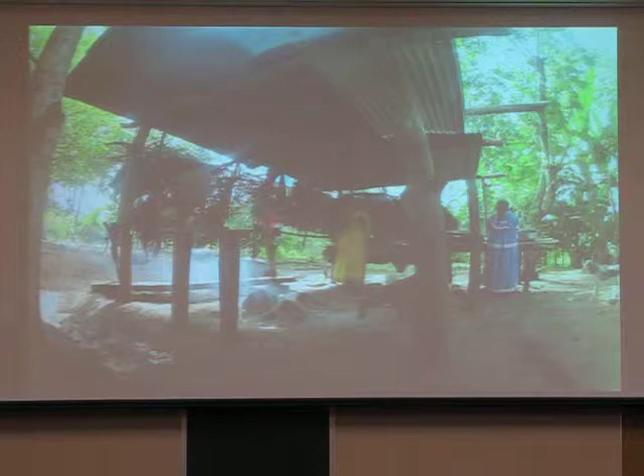An interesting thing we encountered in the community is the boiling of the water was not done at all for a sanitation reason or for disinfection, but simply for cooking their food. When they would cook their coffee, they would boil a couple inches of water, and that would form some treatment, but then they would add untreated water to dilute it. So this boiling of water was important, but it wasn't for the purpose of treating the water, which we found to be an issue.

Currently, water for households for cooking and drinking is carried by bucket from each water source. Each water source is also used for laundry and for bathing.

The task of going and getting water and bringing it back is very time consuming, and while speaking with the community members and the Peace Corps volunteer, it was determined that the need for accessible, clean water was of great importance to the community.

Yucca Engineering then tasked themselves with conducting a water quality assessment, and they also did a water quantity assessment at the source.

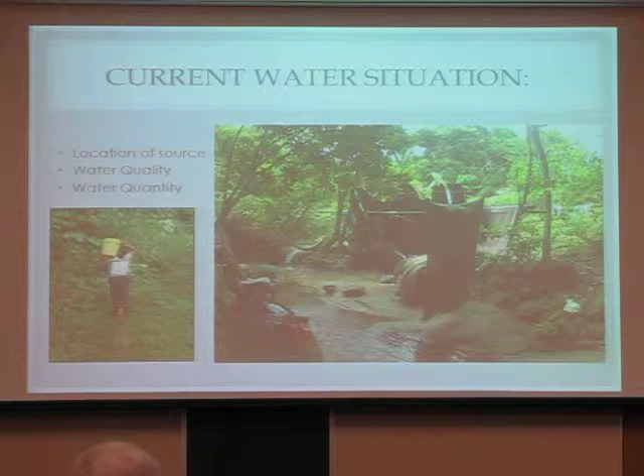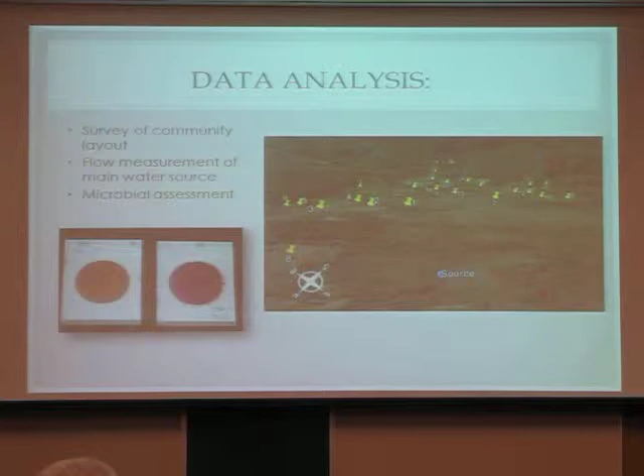First, Yucca Engineering hiked around the entire community with volunteers, and by using a GPS, we were able to pinpoint, as seen here with the yellow pins, each household in the community. As you can see, the community is not very widespread. It basically goes from uphill to downhill, and that was a good part of our assessment trip, to figure out where everything was.

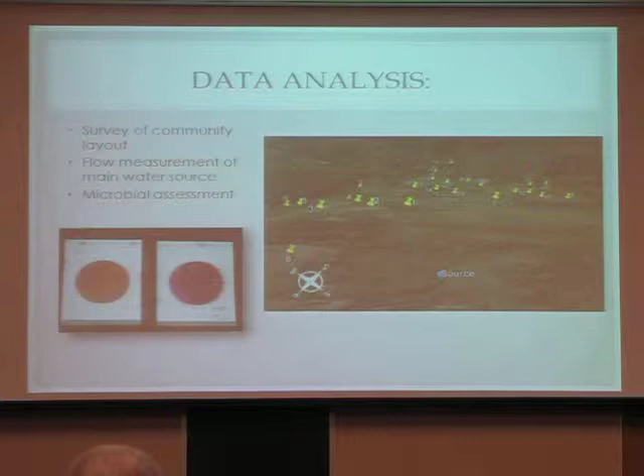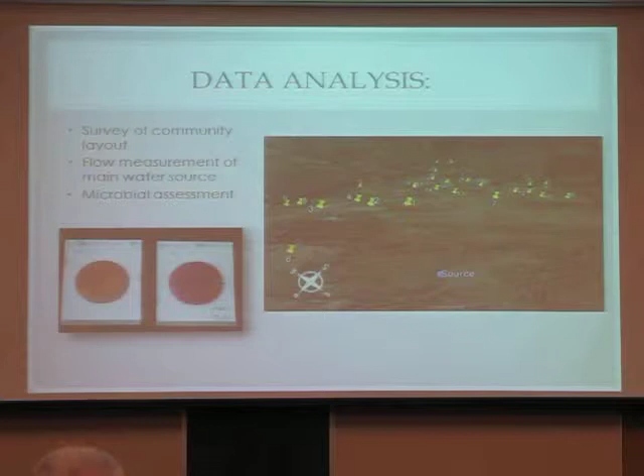The source location was also recorded, and a flow measurement at the source was taken using a volume-to-time measurement. Another measurement taken was microbial assessment at the source, using 3M Petrifilms to do this assessment. These Petrifilms showed positive for E. coli and total bacteria, which indicate bacterial contamination in this water, and this can be very detrimental to people's health because it can cause severe diarrhea.

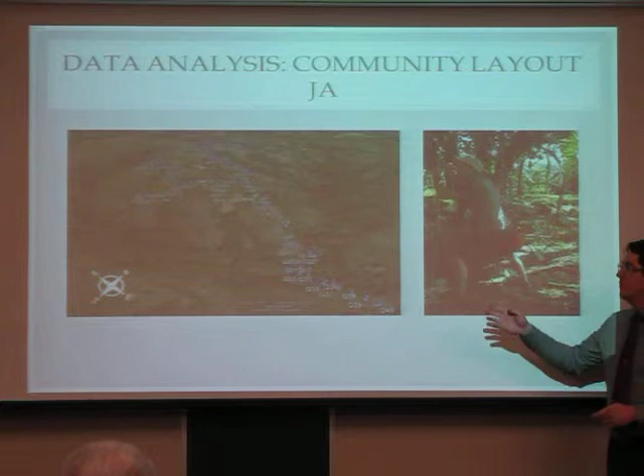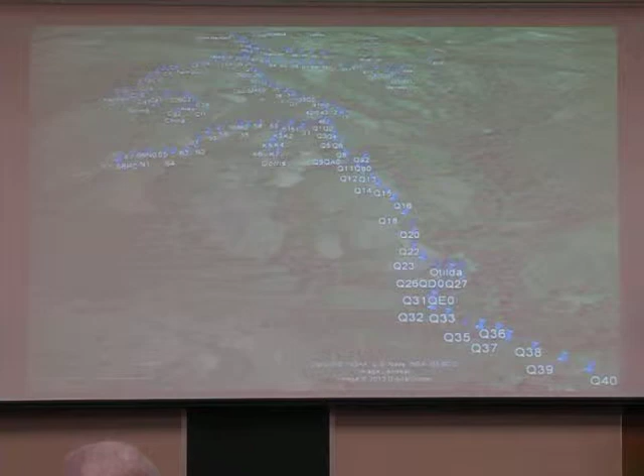I was incredibly disoriented the entire time we were there. We'd get in a house and they'd say which way back to camp, and I had no idea. But they knew exactly where they were going. There's a little over 300 survey points, and just over 3 miles of pipeline here.

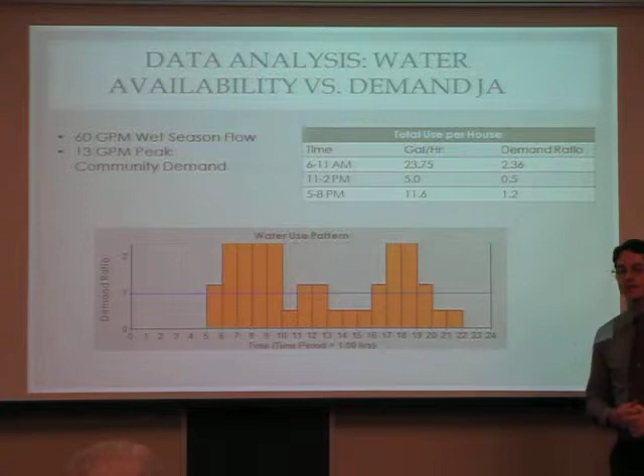The next data analysis was looking at water flow. We wanted to make sure there's enough water flow within the system to supply the pipeline. At the source that the community members identified, there was 60 gallons per minute of water during the wet season. However, we were told by our Peace Corps volunteer Jacob Midkiff that during the dry season this may be as low as 1 gallon per minute.

Another Peace Corps volunteer, Christopher Kingsley, gave us water use demands from a community he had spent time with, which was culturally similar to the one we stayed with. Through that, we were able to look at demand ratios, which we then applied to the 30 gallons per day per person recommended by the Panamanian Health Administration. Through these demand ratios, we achieved a water use pattern to look at local demands for each individual household.

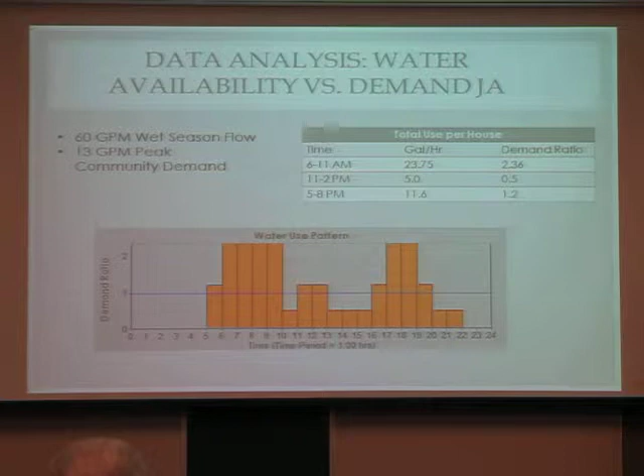What we determined was that the entire community's peak demand was 13 gallons per minute during typical use hours in the morning and afternoon. During the wet season, when we have 60 gallons per minute of availability, there's more than enough water to supply the system. So the water distribution system at this point would definitely be achievable.

The next step, following our data analysis, we flew back to the United States and began to design the system. We used a computer model called EPANet, which was incredibly interesting to work with. It taught us a lot.

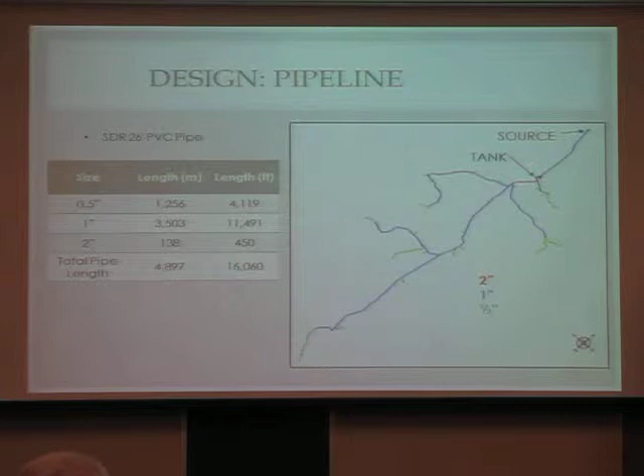This is a map of the system within EPANet. In the upper right-hand corner we have the source, and it flows from there into an inline chlorinator, and then the storage tank. From there, it travels to the rest of the system, branches out to all the houses, and at each house is a tap stand with a faucet. With this system, we're using SDR 26 PVC pipe, chosen for its relatively cheap cost and structural rating capability. You can see there's 2-inch, 1-inch, and 1/2-inch pipe leading up to each individual water service line.

We've designed to have a spring box sitting at the source, and the main purpose of having a spring box is to remove any large solids before they enter the system, and to also capture and contain all of that water inside the box.

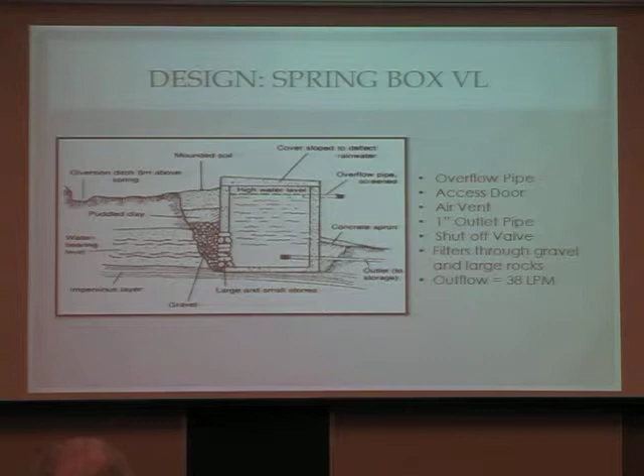We've also designed 32 tap stands, one at each individual household. We did this because the community members expressed their desire to have tap stands at their homes because they had to walk so far on foot with buckets to retrieve their water. This will allow them to get water much, much closer to their homes.

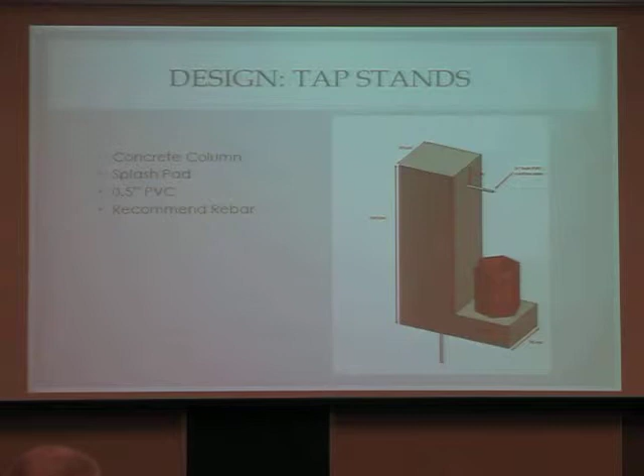This is our design here. We've designed a concrete column, and the splash pad will reduce erosion when the water is turned on. There will be faucets, so the water won't be running continuously. That pipe is a 1/2-inch PVC, and we're also recommending 1 piece of rebar inside that concrete column to increase structural stability.

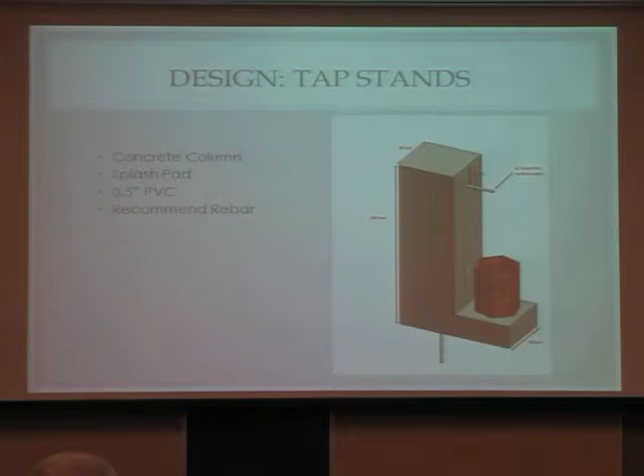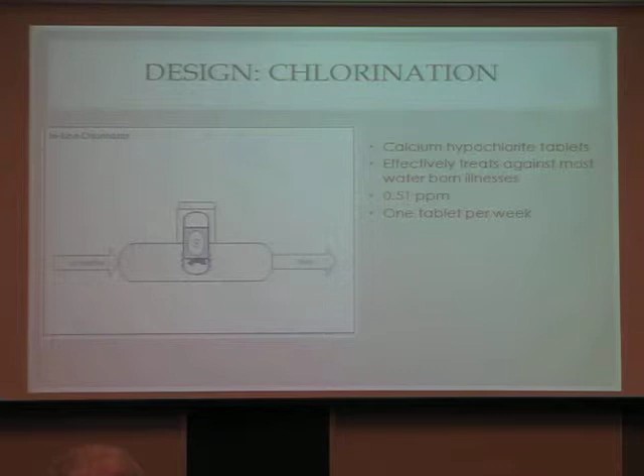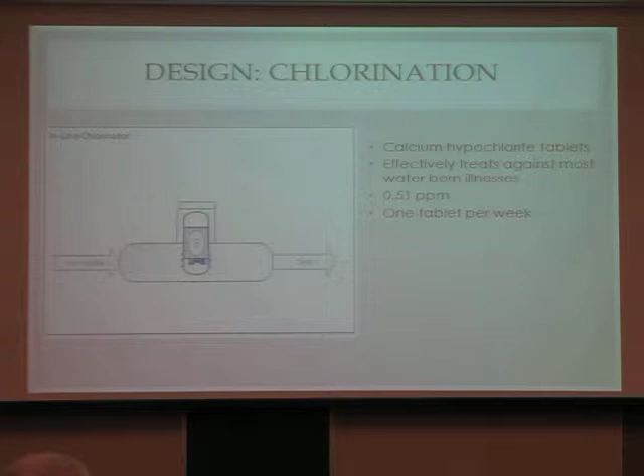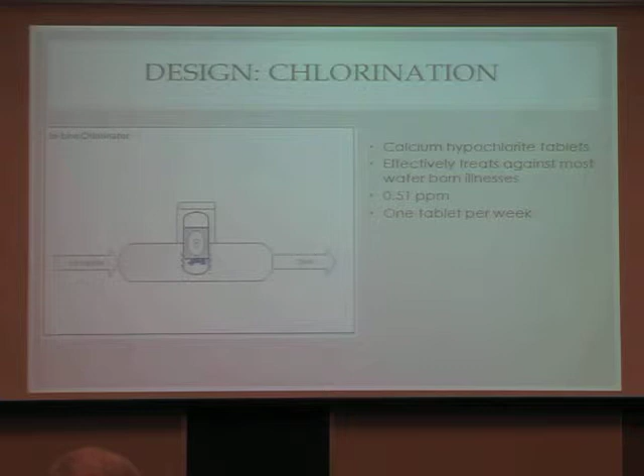Each tablet is expected to last 1 week within the chlorinator, and after that it will need to be replaced by a volunteer. As water passes through the chlorinator and is contacted with the chlorine, the water is dosed with 1/2 milligram per liter. Coupled with the treatment time in the storage tank, this concentration is adequate to treat most pathogens.

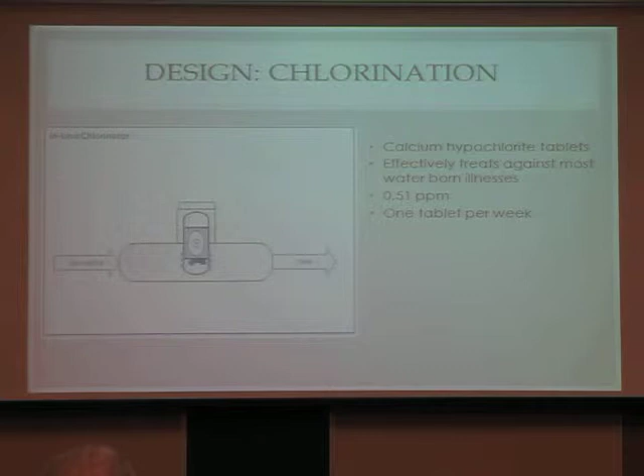Following the chlorinator, once the water is captured in the spring box, there will be a storage tank in our system, serving 2 main purposes. First, it will act as a way to store water during the night when water isn't being used, so during the day there'll be adequate water for the community without needing a very large inflow into the tank. Also, the storage tank will provide contact time with the chlorine, allowing proper time for aeration and mixing so pathogens will be treated before any consumption occurs.

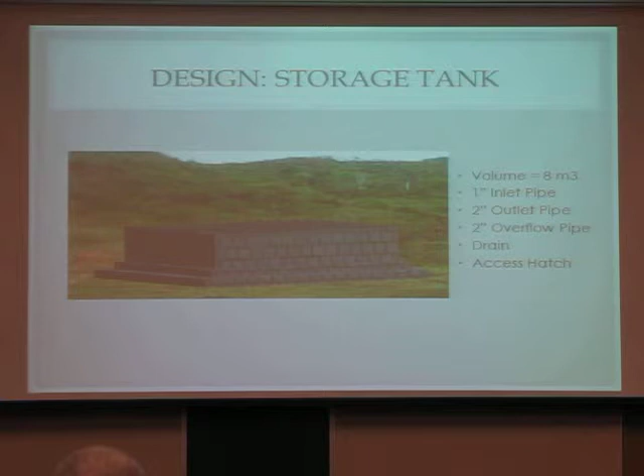We've designed the storage tank to be constructed with concrete blocks, sealed in with concrete and a sealer. It'll hold 8 cubic meters of water at its peak, with an inflow and outflow pipe as well as an overflow pipe designed to run underground to a nearby ravine, reducing erosion around the tank from overflow.

In addition to the design components already touched on, we encountered 2 main challenges in designing our system: high pressures due to a lot of elevation changes, and gully crossings that our pipeline has to cross to reach all the homes in the community. We tackled both of these challenges in unique ways.

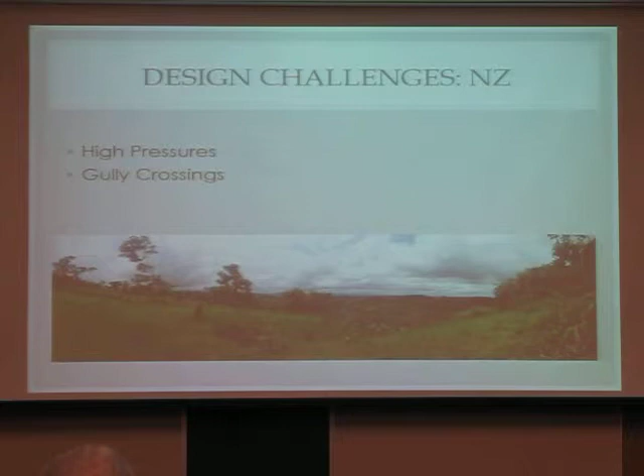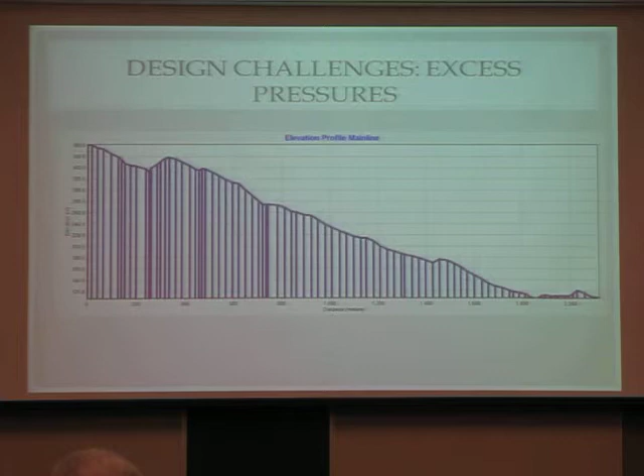The pipe can only withstand 112 psi, and likewise we only want the faucets to withstand 80 psi for safety reasons. So to combat this challenge, we implemented break pressure tanks throughout the system.

Break pressure tanks, like this standard one, are basically small tanks of maybe a cubic meter where water flows in, is reduced to atmospheric pressure, and then flows out again, with a float valve to block overflow during static hours.

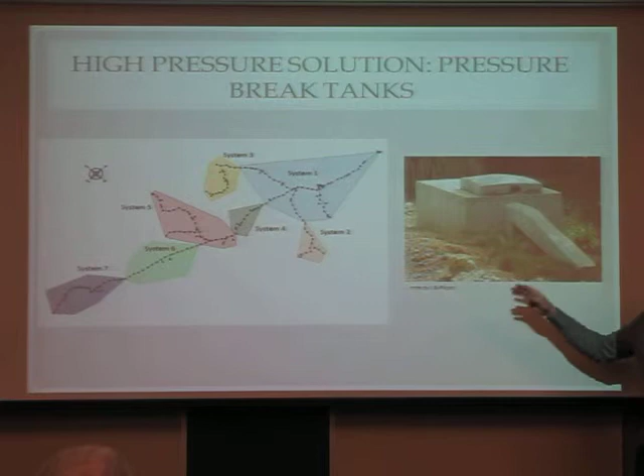In order to model this within EPANET, we split up the entire model into 7 subsystems, where each subsystem begins with a break pressure tank located there. Overall, there are 6 tanks within the system.

For the gully crossings, we chose to design two suspension bridges for the system. Suspension bridges were chosen because they're low maintenance, easy to construct, and fairly reasonable as far as costs go. For these 2 bridges, we've designed 1/8-inch steel cables to provide stability for the pipes crossing, anchored with 1 cubic meter blocks on each end of the pipeline.

To protect the main line, which is a 1-inch SDR26 PVC pipe crossing in the gully crossing, we are recommending a 2-inch PVC pipe encase that pipe, so UV radiation won't deteriorate the pipe, and being exposed it won't be damaged from foot traffic or from animals crossing.

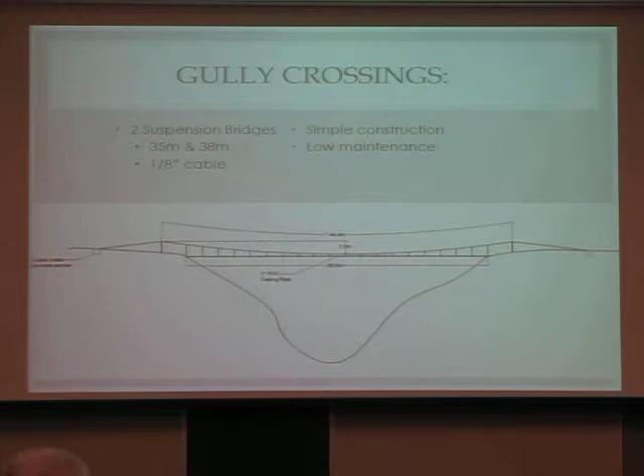This would give the community members freedom to choose what type of method they wanted to use to clean their water, though currently this is not employed in the community.

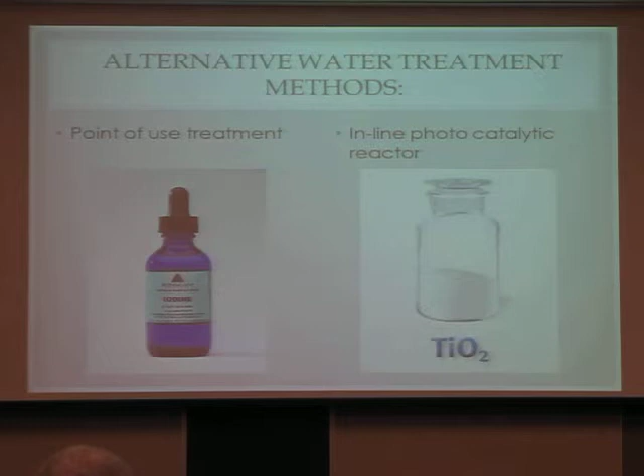The inline water treatment method was favored, and an option for this would be an inline photocatalytic reactor, where a photocatalyst such as titanium dioxide is put in line just like the chlorinator, exposed to sunlight, enhancing UV treatment. The cost and maintenance of a system like this did not compare to the low maintenance and low cost of the chlorinator.

With our final design complete, we could determine and quantify the materials needed for the actual design. Our final cost estimate is $12,300, with our most expensive item being the pipeline at just over $5,000, due to the amount of PVC pipe needed to service the system. We were hoping the total cost would come in around $10,000, and obviously this is a little bit higher.

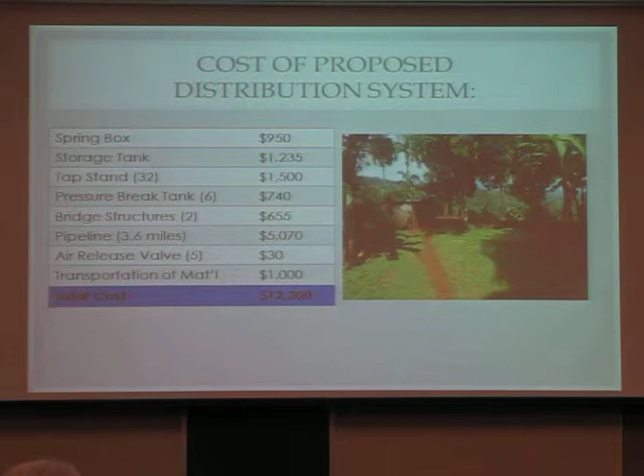It's important to note that we did add a 10% contingency fee, just because we're not sure what could happen in any unforeseen circumstances. We also have not included labor; we're hoping that the community can provide those needs.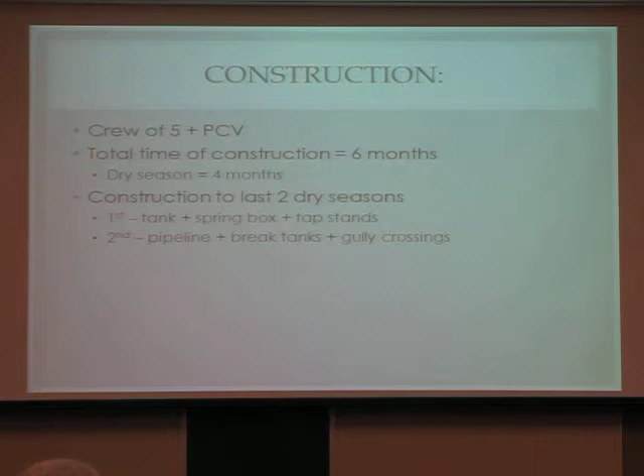We are hoping the community will be able to offer 5 labor crew hands to work with 1 Peace Corps volunteer in the construction process. With this crew, we've estimated that complete construction will last a total of 6 months, which unfortunately spans longer than the dry seasons when construction will happen. So we're suggesting construction be broken down into 2 main sections, one each dry season.

For the first dry season, the tank, tap stands, and spring box should be designed and constructed. Those can be built first because they're made of concrete, are very structurally sound, and being exposed to the elements for one extra year shouldn't damage them at all.

Come the second dry season, we are suggesting the pipeline be laid, and as that is being laid, the pressure break tanks be placed as well as the gully crossings. These will have to be put in as the pipe gets laid, because the exact location of the pipeline right now can be estimated but not exactly determined, since any rocks or large trees not accounted for in the survey might interrupt the pipeline.

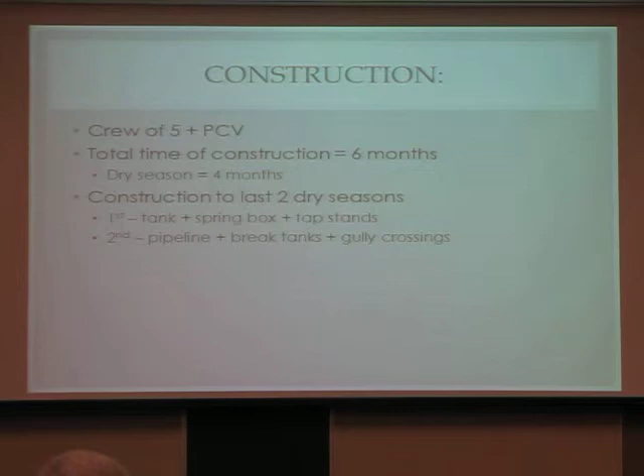Yucca Engineering has designed a proposed gravity-fed water distribution system that will allow the community members to retrieve water much closer to their homes and of a higher water quality standard. We're going to submit this design to the Peace Corps, and we're hoping for funding so that the design can become a reality and the community members can actually benefit from it.

Question about your cost estimate. It looked like the tap stands turned out to be a fairly high cost item. 32 tap stands, $1,500. Did you do any value engineering? Are there other alternatives to that concrete?